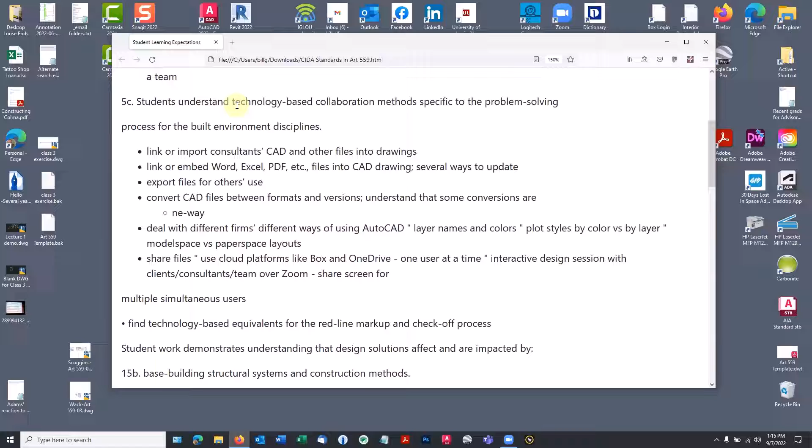Understand - we're going to be doing this in the course of the homework exercises and exercises in class. That's sort of the nuts and bolts of information transfer.

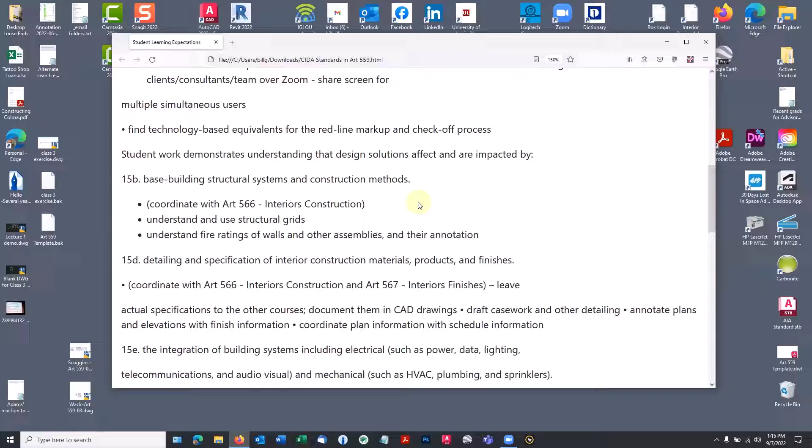It says that you understand base building structural systems and construction methods. A lot of that'll really be covered in the interiors construction course, like how things are actually put together, but we'll be drawing them in this class and wanting to know how that all works - how we use a structural grid for a building, what's a fire rating, what does it mean to specify a wall with a given fire rating, and then to understand what those pieces are and be able to draw them.

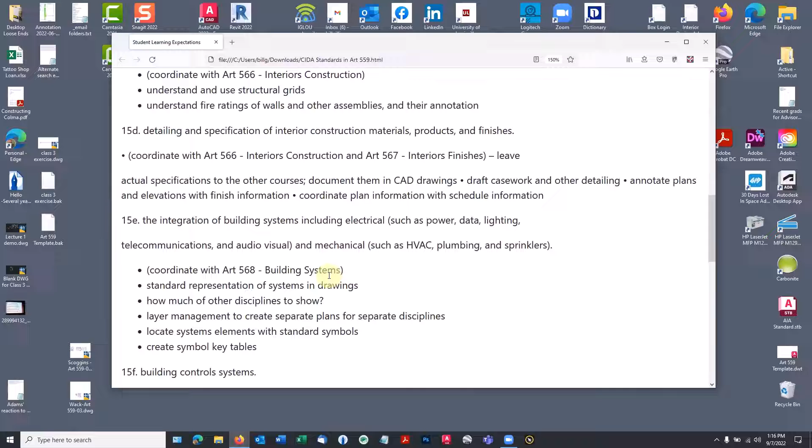15E - this is one we sort of fell down on, as far as I was concerned, in the most recent CIDA review, was people really didn't have much to do at all with HVAC in their projects. Even just putting ceiling registers means, at least I've thought about it that much. A lot of times you didn't have that - fire sprinklers, exit signs, that kind of stuff.

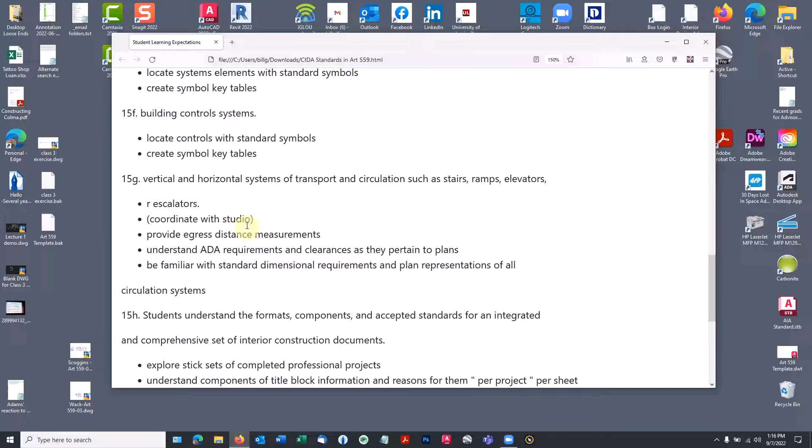Control systems, escalators, egress distances, that kind of stuff. And then here, 15I, I think is really important: students are able to read and interpret construction documents.

My architect I've worked with for years here grew up in Chattanooga. On the way home from school, once he got into junior high or high school, he walked down the alley past an architect's office and would take drawings out of their dumpster and take them home and just pore over them. Like, what's all this about? I guess he was interested before, but really thought this could be something, and eventually ended up working for them. So it's kind of a cool story.

What the different kinds of drawings are, how we go from general information to more and more specific as we go down through the drawing set. And then what it will be for you guys to contribute to producing contract drawings that go into a set like this, whether it's one firm doing office layout or a whole new building. I'm still figuring out just when that will happen, but we'll get to it all. And if you feel like you haven't hit one of these by about Thanksgiving, let's talk about it, because I really need to do it, or pick it up next semester, but I'd rather get as much done now as I can.

I'd like to talk about that first assignment. Let's look at two from a couple of years back to get a sense of what I'm looking for. So this is officially assignment number 1, where you measure your apartment. This was one where the second part of the assignment was drawing interior elevations, but right now we're just dealing with this much.

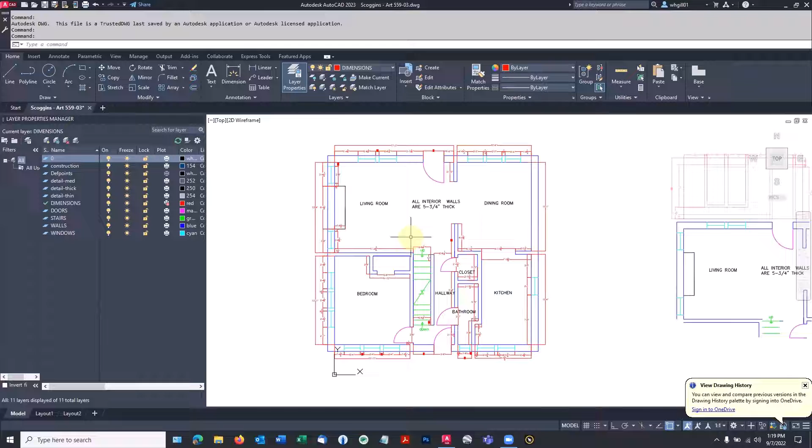I think this is a pretty successful first stab at this project. You can see we've got everything measured and dimensioned. The dimensions are all nice and clean, lined up across with each other. They're not jumping around—it's very easy to tell what dimension applies to what element that way.

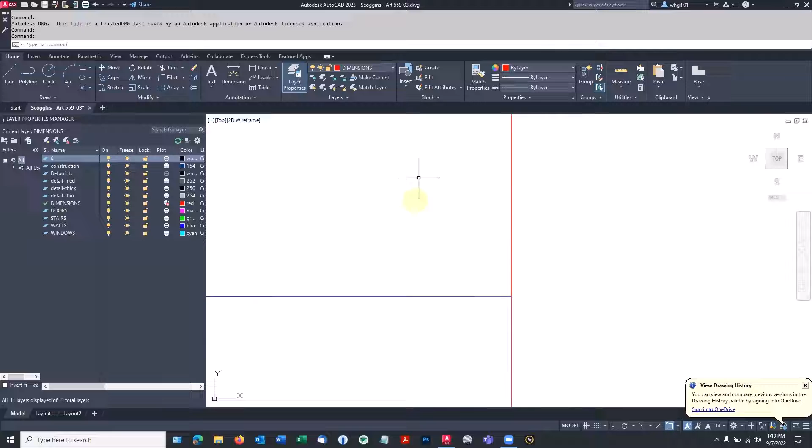One thing that didn't work well here was the dimension style, the way it was set up. The point is set up to actually touch the object being dimensioned, and it really works better if it's clear—a lot of times if it's back there, so you don't start confusing the dimension itself with the thing. We'll get into line weights, to the point of making dimension lines as thin as they possibly can plot, and other lines heavier, so you can be aware of that distance.

To me, a plotter is to a design program what a kiln is to ceramics. You just have to see what these things look like big. I mean, PDFs are great, but you're looking at it on a screen that's this big. So we'll get that worked out.

One of the problems is this is from Hewlett Packard, and Canon now has the total lock on university printing services. So I don't know how it's going to happen, but it'll happen.

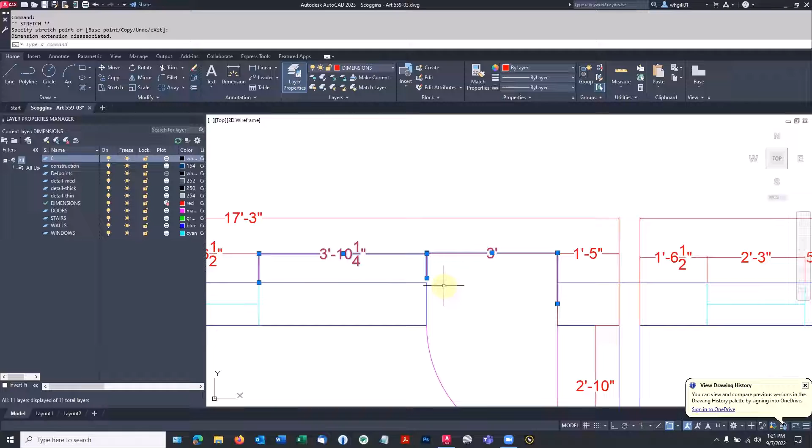We might think that the end product of our whole process is a lovely space, an efficient space or whatever. But our actual product is monochrome, large paper drawings. We produce paper that somebody else turns into the product. Everything we need to communicate has got to be back in the drawing somewhere. And how to do that clearly and efficiently, with sort of maximum effect for minimum effort, is just part of what CAD is all about.

Okay, so here's her drawing. The one I want to bring up is the one that's in the assignment.

What I'm interested in here is understanding how rooms relate to each other—how thick is that wall between them, even if you can't measure it directly. There might be a chimney in there. You might think it's this wide, and it's actually this wide because of stuff going on. And you really need to know that.

I say sketch the plans of the 3 rooms at 1/4 inch. If it'll fit at 1/2 inch equals a foot, do it at 1/2 inch, as big as will fit on your sheet of paper. Again, sketching is just what you would do on the job site—you don't have a straight edge. Graph paper will get you close enough.

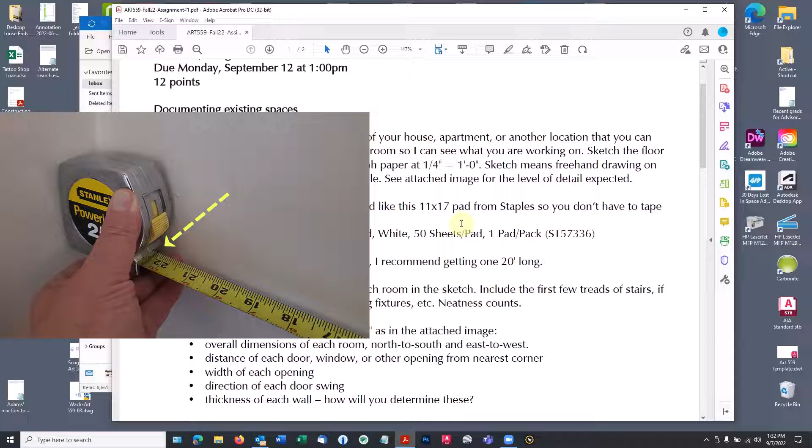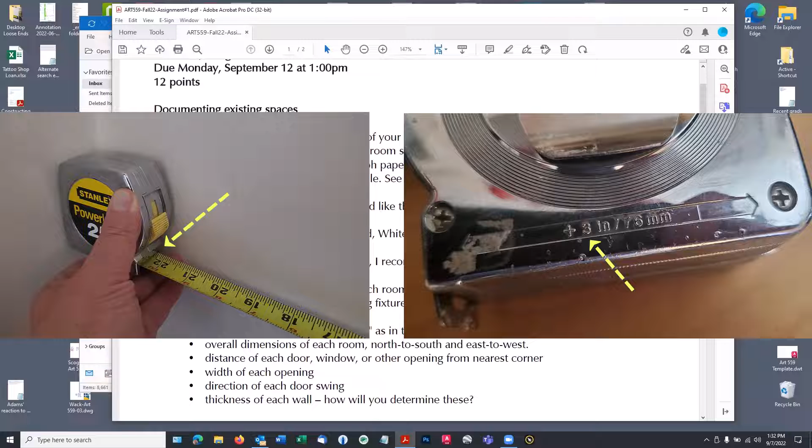One thing about tape measures: when you're measuring to the inside of something, and you need to read off this measurement and then add something to it, it's really helpful if you get a tape measure that's an even number of inches, instead of having to add 2 3/4 to something, or add 1 7/8. If you don't have one already, if this is a new purchase for you, just get a 3-inch one. That's fine.

And also, the wider they are, the farther they'll go before you have to... it droops. And I find for long walls, let's pretend this is a wall that's longer than I can measure.

It's fine to measure those first 6 feet, make a mark right there, and then measure back that way to that same thing and add those two together. You can use, if it's fancy, your fingernail to make a little mark on the wallpaper, something like that. If it's a building that's coming down, do whatever you want.

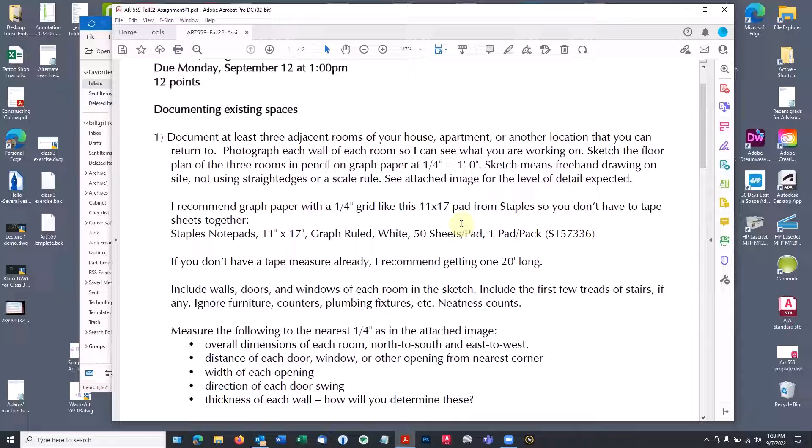So I'm looking for, as in the attached image below, where everything is. Objects have two dimensional criteria: one is where it is, well, let's say that column right there, and the other is how big it is. So positional information as well as dimensional.

Scanning, that computer and the scanner work fine together. The scanner software is installed on it when you're scanning your thing finally. And if we need to go over that, everybody can use a scanner. You figure it out, the instruction book's right on top of it. You do want to turn it on.

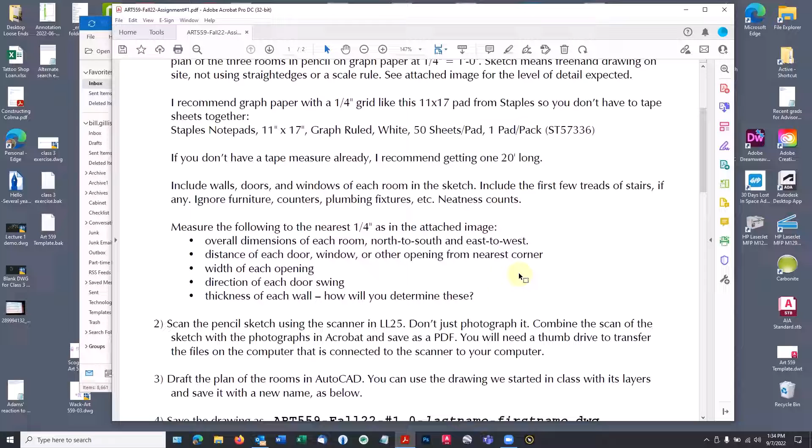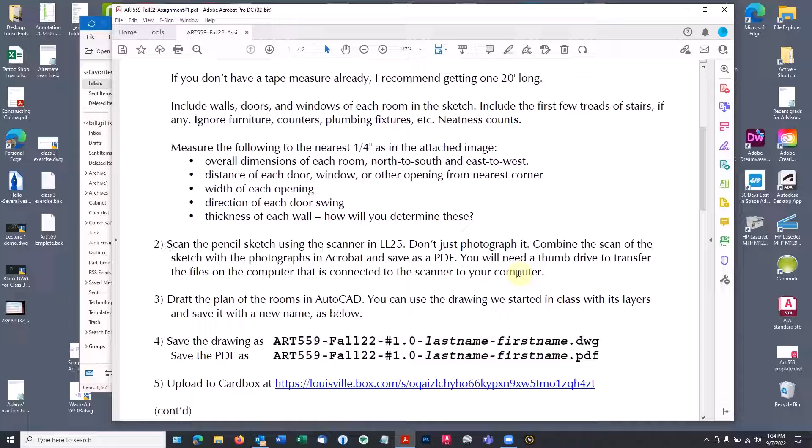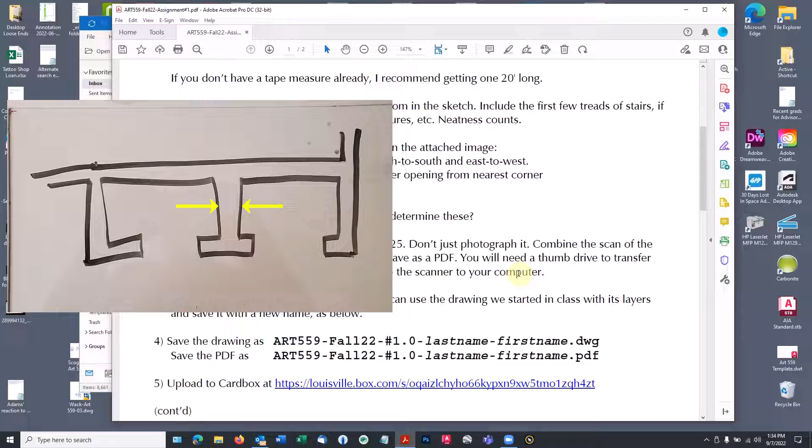I do want to bring up a couple of things about thickness of walls. If you've got a room that's like this, another room that's like that, and you want to know what this distance is, measure that, measure that, measure that, subtract the two little guys from the big one, and then you'll get the other one.

On this assignment sheet, don't upload to this one, upload to your own Cardbox. Here's what I'm looking for. If it's a space I can get to, if we're doing this suite again or something, I wouldn't need photographs, but this way it's your own space, but I need to make sure you're not leaving out windows or jogs or chimneys or something or other.

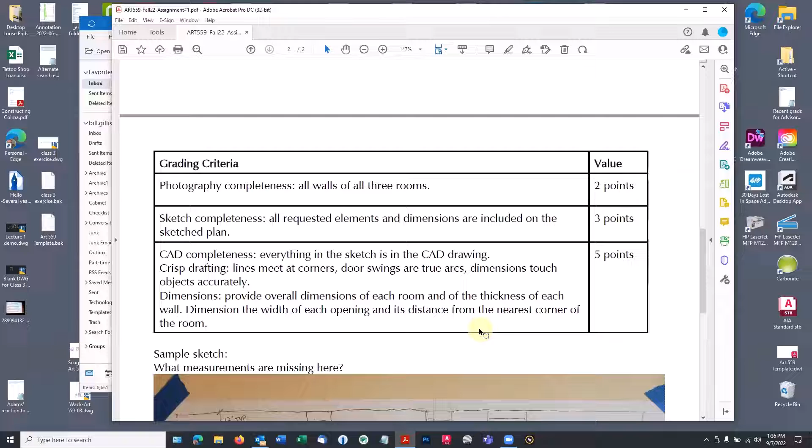So I just stand on all the way back on one side, take that picture. It helps a little bit if you go clockwise, so that when you're scrolling through, it looks like you're moving from one to the next instead of going backwards. Not requesting that many elements, just the walls, doors, windows, and other openings, chimney and stuff like that.

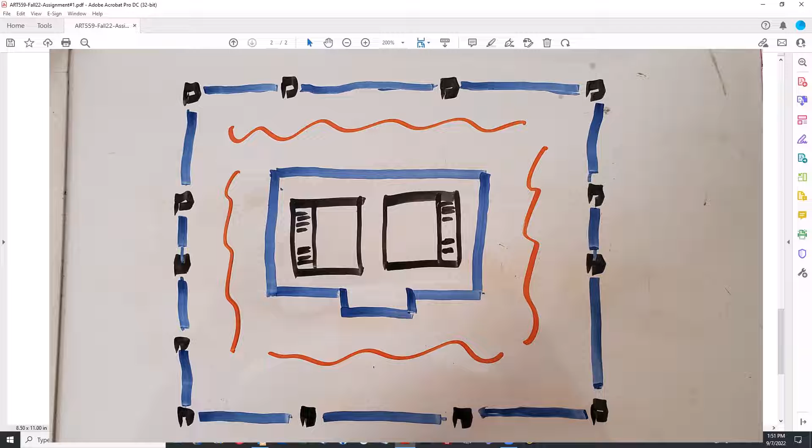So we have to do the egress calculations for each of these. But there are clearly at least those three separations of stuff. Structural starts out with these larger plans. Each of these has lots of detail sections coming out. There's something very specific happening here on detail 2 and on sheet 301.

So we kick down to 301, and we see detail number one starts here and goes up like that. You'll notice something funny—it's sort of opposite from comic book reading. That's just because if you've got a lot of big drawings and there are only like 3 drawings on the page, you don't want to have to unroll everything to go over here. You just want to unroll it enough to see what's going on. So usually they go this way, just an office preference.

But anyway, so what they're saying is there's something bearing on something or other, and some new CMU walls, and that'll make sense to whoever actually has to put that together. Retrofitting an old building, doing something very new in an old masonry building, is a really painstaking process.

More to the point, pretty much the way the drawing sets work is they go from large drawings that show a lot and not a great deal of detail, and then from there we get referred up to large scale plans. This is telling us on sheet A303, if we're looking that way, it's view 5. So looking at the head of the bed that way is what we're seeing there.

One thing I don't see here is something that the Corps of Engineers insists upon, which is every time you have an interior elevation, you have to say what larger drawing asked for that. So if you just come across this, you can say, where is this? That's a sort of backtracking that takes a great deal of time to do and also to check.

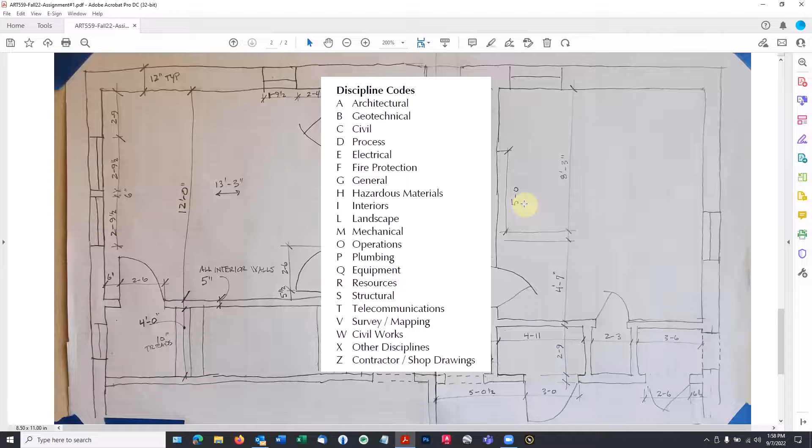Within the CAD drawing or set of drawings, we have a similar arrangement using the same letters—architectural title sheets showing architectural layers, structural title sheets showing structural layers. So there's a coordination there of the discipline on the sheet and the discipline in the drawing. And that might be a good time to head back to the screen and take a look at that.

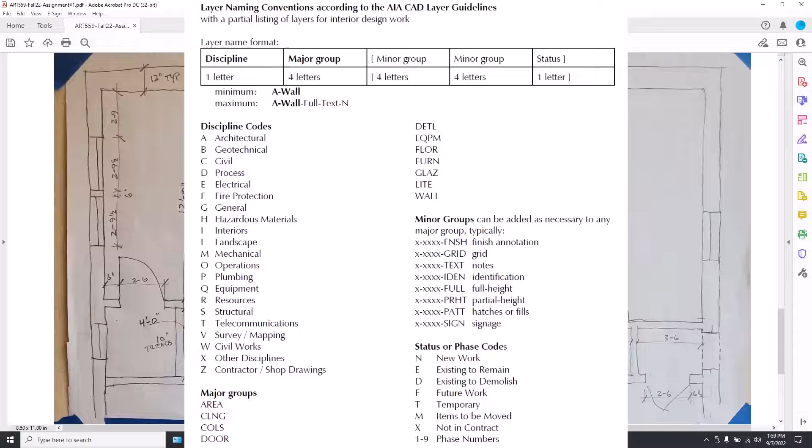A student asked, who decides who does what within a given drawing? Well, it might well be that the architect is doing the dimensioned floor plan to show the carpenters where to build those walls. Then interior design will take that drawing and add layers for FF&E and interior design stuff. I wish I could give you a clean answer, but if they're in the same firm, it's probably the same person doing whatever he or she is told to do—put a wall, put some furniture in. If they're clearly two separate firms, the contract would say you're responsible for this information on these drawings.

And I have to say, guys, there's really nothing hard and fast in what I'm telling you right now. Certainly with AutoCAD, it's sort of a Wild West environment where you can make any layer, any color that you want, any name that you want, and put anything on it that you want.

What we'll be going through today, for the rest of the day, are some standards that have been tried to be imposed upon that. It's a little like Wyatt Earp coming to Dodge City and saying, 'Oh, you're straightening up now, you guys,' but not everybody does.

A student asked a question about Deborah Berke's involvement in the 21C project. Deborah Berke's really amazing. She's the dean of the School of Architecture at Yale now, based on just having done great work. She has the vision and really clear ideas of exactly what she wants to happen, and it's her whole firm. They do iteration of design drawings and make sure all the dimensions work. But then they actually turn it over to Norman Berry's office, across the street, to do the drawings that go out for bid to the contractors, who know Kentucky regulations and know the building inspectors and everything they need to do here.

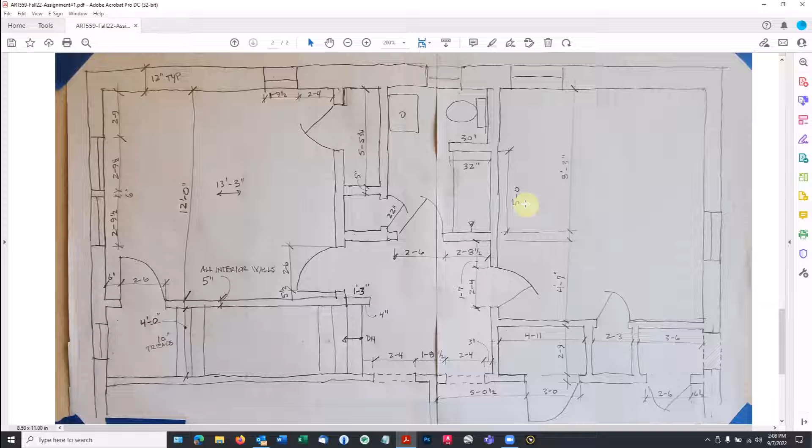Laura McGarity is going to get us some drawings from IDNA. I asked for one set that's pretty much just an interior design project, and another one where you're part of a larger project. Interning somewhere over the summer would be a really good idea to get a feel for that.

I forgot to look at title block information back there. In addition to each unique drawing number, like A101, A102, S101, whatever, there'll be information, the normal stuff—the client name, the address, things like that. Also the date it was issued, so that if a new set of drawings comes in, you can tell that the one from September 10 needs to be replaced by the one from September 14th. That's pretty important, and it will also have a list of revisions.

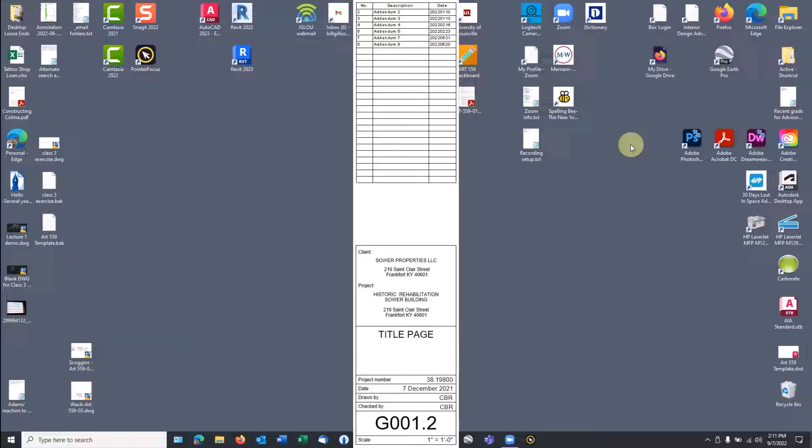If between September 10 and September 14th, this was all turned into one big closet instead of two little ones, in the latter version this would be erased, these would be filled in, and this whole area would have a revision cloud. If this was the first set of revisions that went out, it would indicate that, okay, this first set of revisions that came in on the 14th of September, something changed here. You can go look at what used to be there if you want, but this is what we want to have now. So the revisions on the title block—you can go back and look at them, and we'll keep track of those. Each revision will have a number, a date, and a brief description making clear what that is. So a drawing set really isn't fixed until the building's been built—they can keep getting changed and updated, and keeping track of those updates is another part of the whole process.

And sometimes the changes will be ones that are requested by the contractor, saying there's a gas main that runs through here, we can't put the foundation there. Or we're noticing that the existing column is rotting, we need to replace that. How do we do that?

Well, with all these possible ways of arranging a drawing, I have created for you guys a standard AutoCAD template just to start with. So at least you're starting with a file that has some layers named the way we're looking at, and dimensions work the way we want them to. This is basically an AutoCAD drawing with a lot of settings set the way we want, but nothing drawn in it yet. Just a blank canvas that's the right size, the right shape, and behaves the way we want.

It's the ART 559 template, which is in the course contents for week 3. I just leave mine on my desktop. And to start a new file with that as the beginning, I just double click this. AutoCAD realizes that it's a template, not an actual drawing — it's the settings for a drawing. We double click that, up it comes, ready to go.

A couple of things in it: I started by putting in layers that might be useful to you in drawing your apartment project. And if you'll look, they're here. And then on page 2 of all this is the rather exhaustive standard that the American Institute of Architects, in conjunction with, it's like the Navy and American Building Trades Council and I don't know who all else, have put together as a way to try to standardize how layers work in AutoCAD.

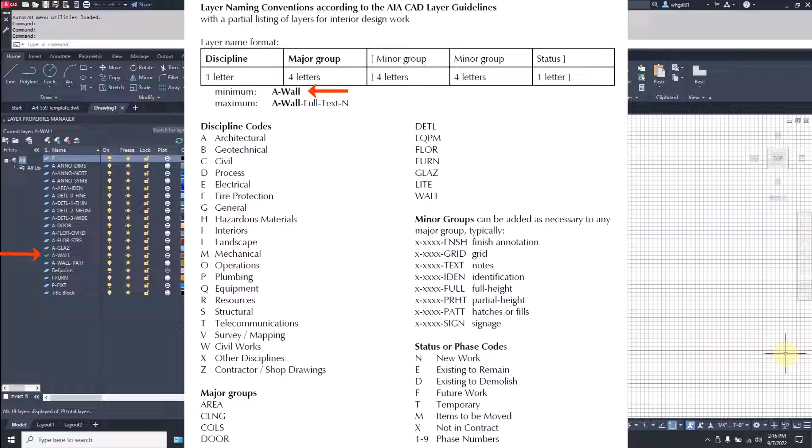The way it basically works is each layer name can have a couple of different parts depending on how much detail you need to get into. The very minimum length of a name is one letter for each of those disciplines we saw out there, because we're A through Z pretty much. Then 4 letters saying what's going on in that layer. So the wall layer would be A for architecture, dash wall for wall. I really hardly ever get off into the 4th and 5th ones here.

Sometimes you need to make a distinction between existing walls and new work — existing to remain and existing to be demolished. That comes up a lot. So you might have a layer for wall existing, wall demo, and wall new. The reason to keep all these separate is when we're putting our sheets together, sometimes we're going to want to see the existing walls and the walls to be demolished. Sometimes we want to see the existing walls that remain and the new partitions going in there. We need to be able to separate these layers and turn them on and off at will. So by the time we get into our final view, we're controlling what we want to show up in that view.

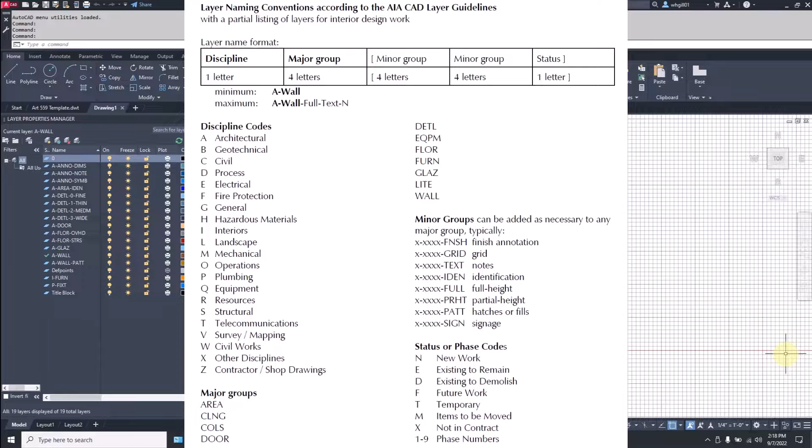With hundreds of things, we can't individually erase, move, or turn off individual objects — it's a whole class of objects that get turned off if I'm turning off a layer. So in addition to layers grouping items by what they are in the drawing, they're grouping them by the things you always want to be able to turn on and off at the same time. Well, let me just do a quick one. I'm going to make my A-wall layer current. We can see this here. Fine. Turn that off.

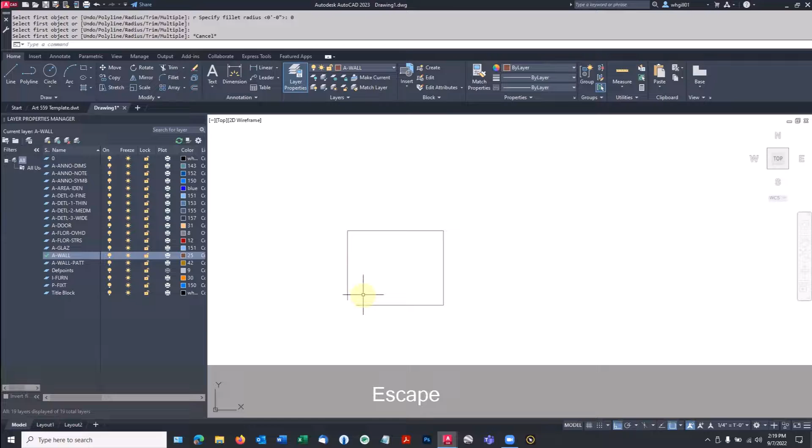Fillet, radius 0, pick.

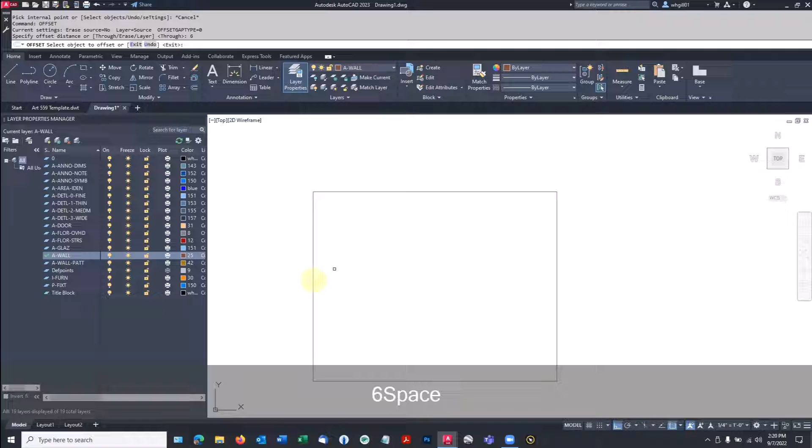So if they're my walls, and then I want to put some furniture in here, which I decided for the purpose of this template drawing will be on the interiors layer, just so we can take credit for it. It's got a new color, and I'll just put some rectangles in.

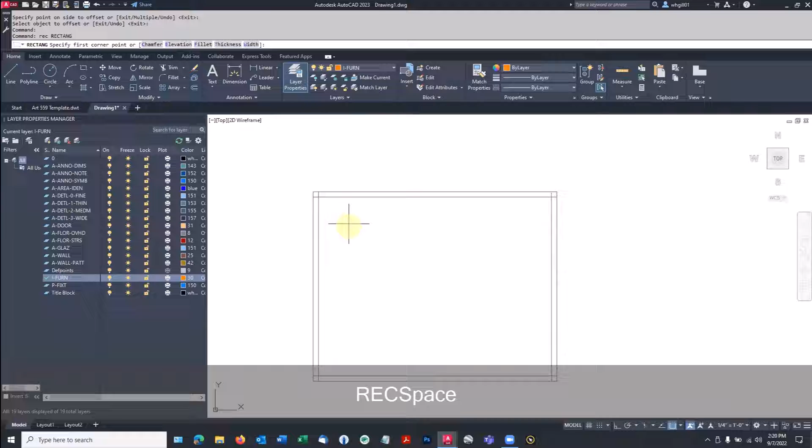Hitting the spacebar repeats the command.

So if I've been working this stuff, and I have doors and windows and all sorts of things in here, but I don't want to show the furniture. I don't want to show the carpenters where the furniture is going, I just want to show them where the walls are going. I can turn off the furniture layer, and you can't actually turn off the layer that's current. So I'll just make the wall layer current again, and then the furniture layer I can simply turn off, or turn it back on again. You see its little icon changes - the yellow light is on, blue light is off.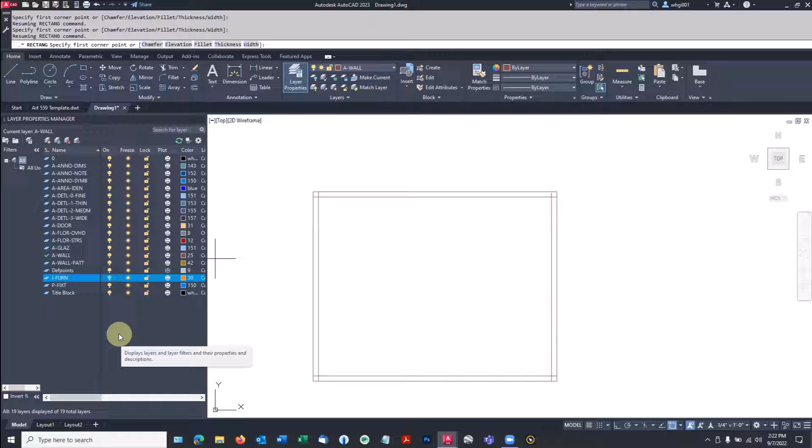With many, many layers, you have the option to have just any combination of those that you want. You can turn dimensions on and off. There will be some times when the architect is showing what they want built, and that would be on one set of layers, and what the interior designer wants might be separate from that. So that'd be our own I-WALL layer.

Let me turn this back on again. I want to look at a couple other things we can do generally with layers. I'm going to pick this furniture layer again and say lock. So the little blue padlock closes, and when that happens, they dim down, so you get a sense that you can't do anything with them.

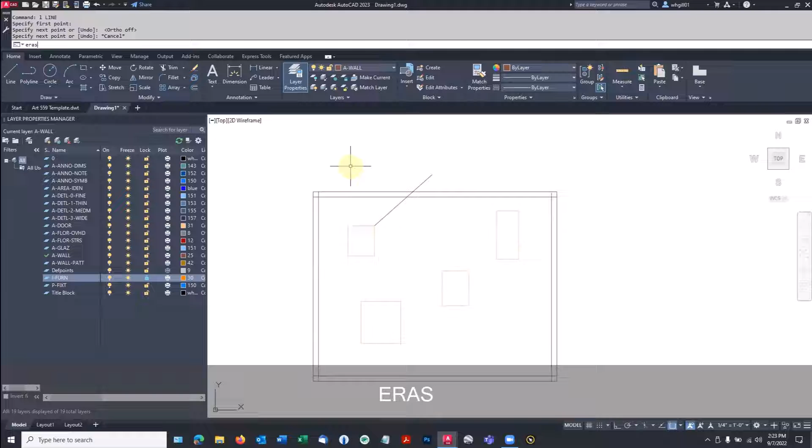You can still select their points, for instance, but if you want to erase them and put up a big window, they're locked, they stay there regardless of what happens to other stuff. Control Z will bring that back.

A couple times I've used this was moving a house and a garage around on a site, trying to figure where they would fit between the trees the best. So we just lock the layer with the trees and then could move the house outline and the garage around it. We got a good sense - had to cut 2 down, but not like 8.

And another option for layers is to freeze them, which locks them and turns them off. This batch of layer controls apply through the whole drawing. Eventually, we'll be setting up individual views on title blocks that we can control individually, but right now, figure that this affects the whole drawing.

So if I make a certain layer like I-FURN no plot, a little button appears there. We'll be able to see it, move it, do whatever we want, but just when we get around to plotting that view, or actually plotting any view, they won't show up. I suggest that you do read at least the 2 chapters that I talk about at the beginning here, chapter 9 especially about layers, and then 14 I think, when we get to more about dimensions.

Another feature of each layer is its color on the screen. CAD comes with 256 standard colors, 0 through 255, and then you can also use the 16 million, the 24-bit color palette. You can choose anything you want.

It used to be when I started doing AutoCAD that the way you controlled how things plotted in terms of line thickness was what color it was on the screen. So it meant if you didn't like your dimensions being yellow and wanted them orange, how they would plot would change, which, especially when you're moving information from a lot of different people's files, was really, really confusing. So although we still have the color so we can differentiate things on screen, it's really easy to tell our furniture from our walls right now.

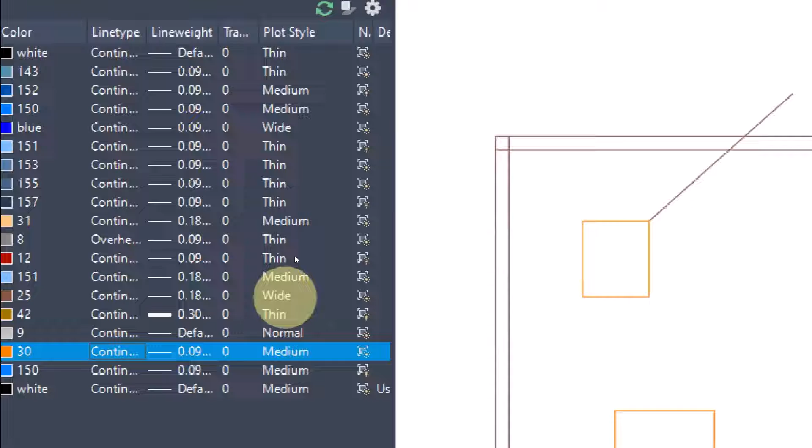I just want to say I've got some things set up for thin, medium, and wide. And the way these work is you can pick it, and in this, the AIA provides, along with this whole layer list, a list of line types, which can either be, if it doesn't say otherwise, a solid black line coming off the plotter, or whatever the color is. We can edit what those are, but fine, thin, medium, and wide are the ones I use, and that's more than enough to keep track of.

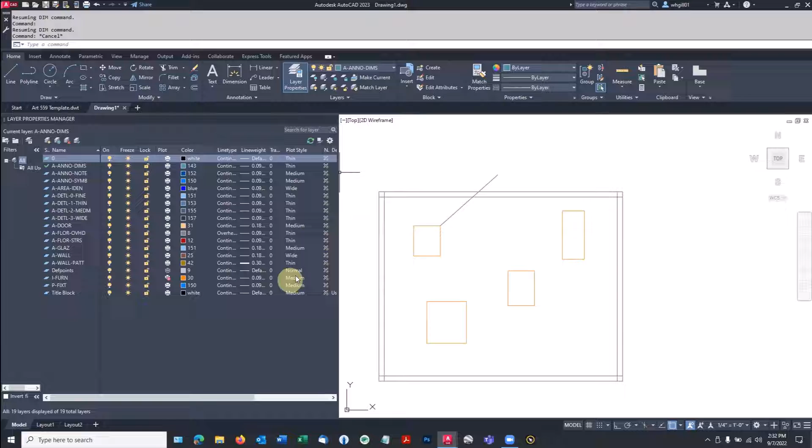But each of these layers has a plot style that will not show up on the screen. Do you see any stuff in your apartment that we don't have a layer for? That A-GLAZ is generically for all window sorts of things. A-GLAZ, A glazing, yeah. Let's make one up.

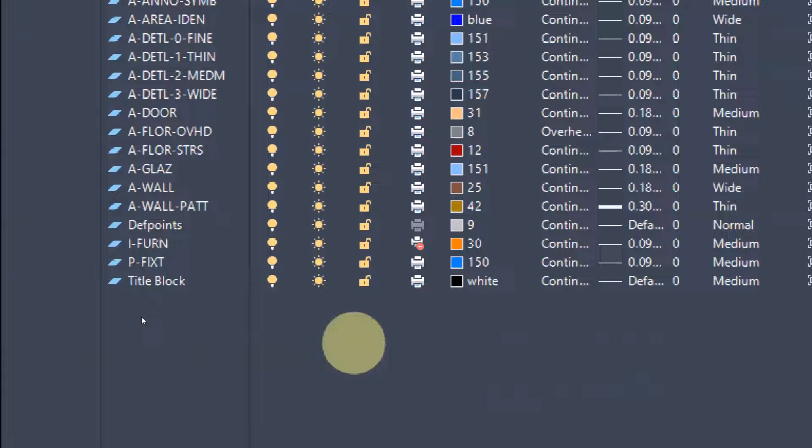A layer for light fixtures. If you're making a layer for light fixtures, I think that has to go under E for electrical. Let's make up a layer for light fixtures, and there's a couple ways to do that. But the easiest is just to come into your layer list, right click, and new layer. It'll put it right wherever your cursor was originally. And we'll call this E-FIXT.

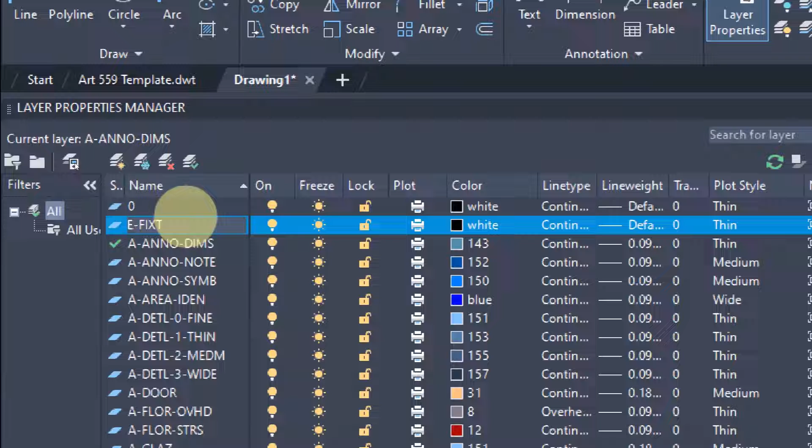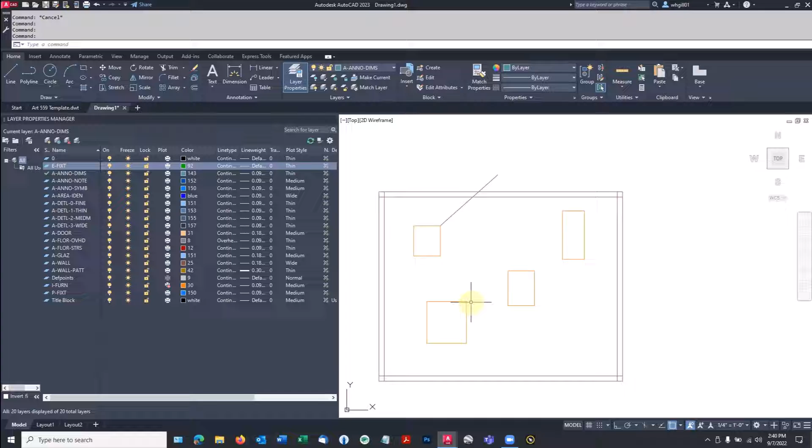This guy here, that would be entirely standard with our groups. So let's make, I don't know, what's a good color? Something will show up against, I'm gonna do a slightly darker green just so it shows up against the white screen. A new layer will inherit the characteristics of the layer that the cursor was previously on, so if we start making more, we'll get more green layers. Let's make this at least a medium thickness.

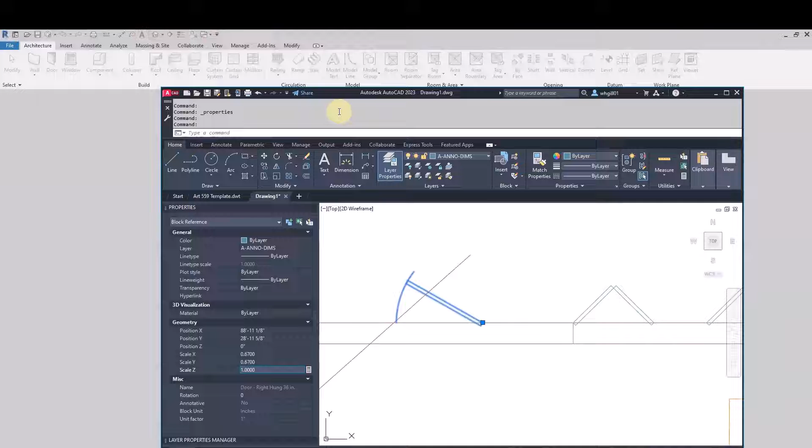This might not be fair, but I want to give you a sense of what this looks like in Revit, just so you know where we're headed. This is the building my son and his wife bought for their tattoo parlor. They're tattoo artists in Cincinnati, going off on their own, bought their own building.

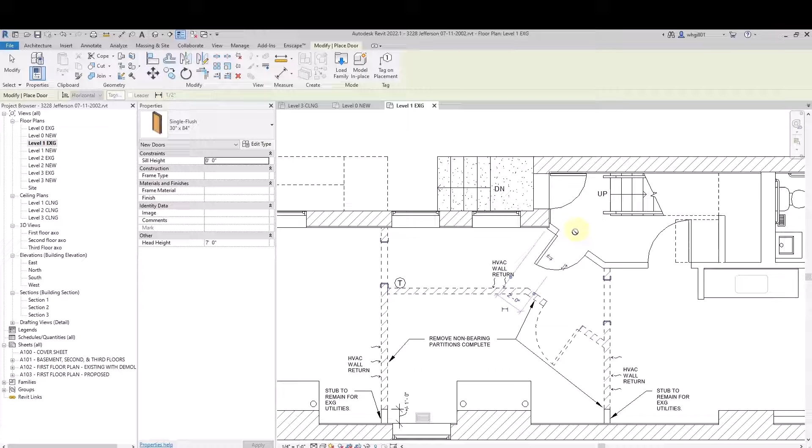If we want to put a door in this wall, in Revit you don't have line and arc tools. You have wall and door and window tools. And a door would be a matter of picking the size you want and placing it. The point is that it's a three-dimensional door. We can look at it from here and see that door in that wall.

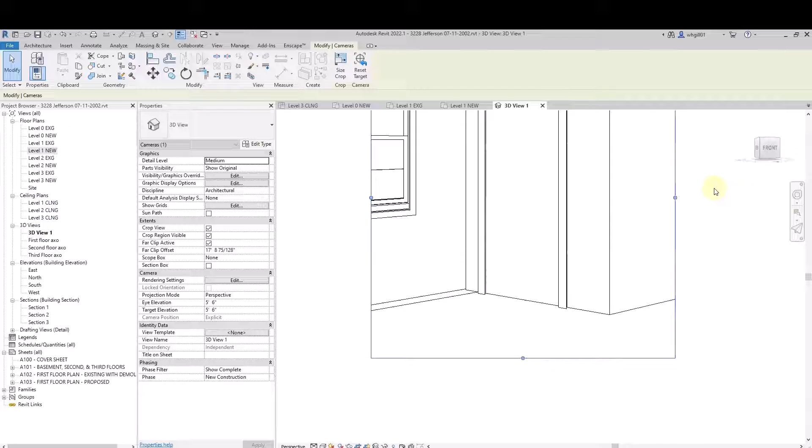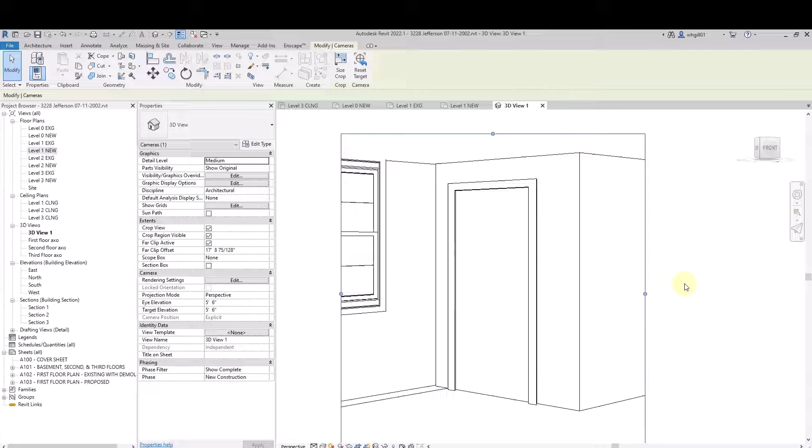So the whole time it looks like you're drafting in plan, you're actually modeling it in 3 dimensions. I know you're thinking, why don't we just do that right away? It's because there's a great deal of basic 2D drafting in Revit, because every 3-dimensional thing is composed of things that start out as 2-dimensional, a rectangle that gives some height, or a seat cushion that gets rounded off, something like that. And you'll see, we'll get to Revit by Halloween.

If you're going from a bike to a Jag, yeah, there's new stuff to learn. It's just the way this goes. But you still got to shift gears, you still got to use the brake, you still got to steer. There's some real threads of continuity that just going directly to Revit wouldn't give you.

But if people don't know how to draw a line the right length, they certainly don't know how to put it on a wall that's the right length. So it's just sort of building up. Think of this as driver ed, just get a feel for it, not the whole thing.

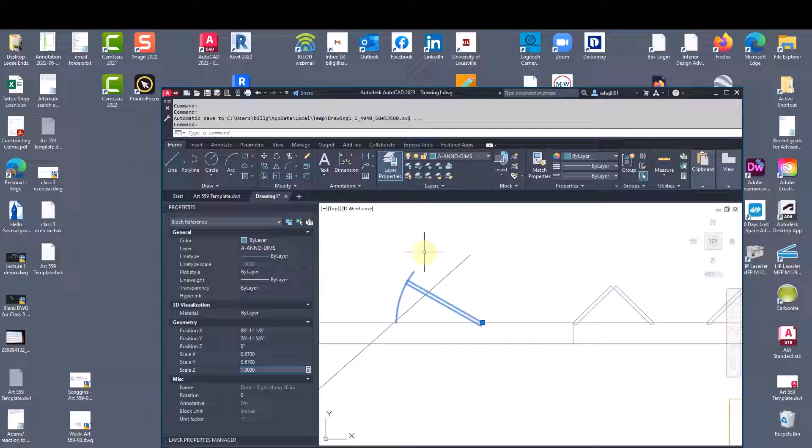This is a really existential question for this course: everybody comes to it with Macs. Do we make everybody buy a fast Windows PC just to run CAD? Does learning it on a Mac make sense when most AEC firms are using Windows? We could teach a couple of programs that have identical Mac and Windows versions, but nobody around here uses them, just nobody, like one firm. Or we put all the computers back in the classroom, wire them up, and everybody uses Windows.